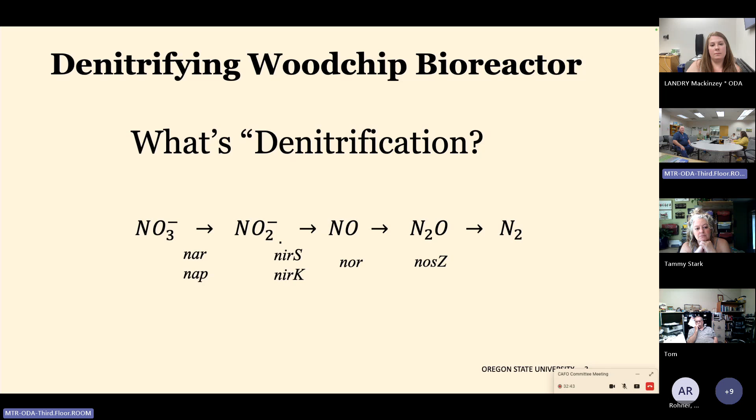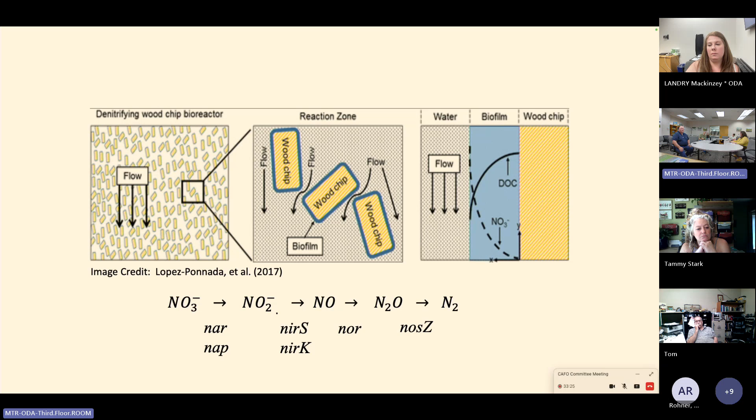Next slide. So this is all mediated through microbes. I won't go into this in too great a depth, but basically the wood chips form a food or substrate for the microbes in the system. When you set the system up, the wood chips are naturally inoculated with denitrifying bacteria that exist in the soil. So as the water flows through the system, you get inoculation. And essentially the microbes use the wood sugars to facilitate the denitrification process. So you do need a carbon source. You do need a source of electrons to convert the nitrate to nitrogen gases. Next slide.

This is a schematic of a wood chip bioreactor, showing basically what we have at the dairy center. We're hooked up to the tile drainage system. We're treating tile drainage output. Basically, it's about a 4-foot depth. The water comes in. There's a 40-acre field upstream at the dairy center, and when there's sufficient rain, it feeds the system.

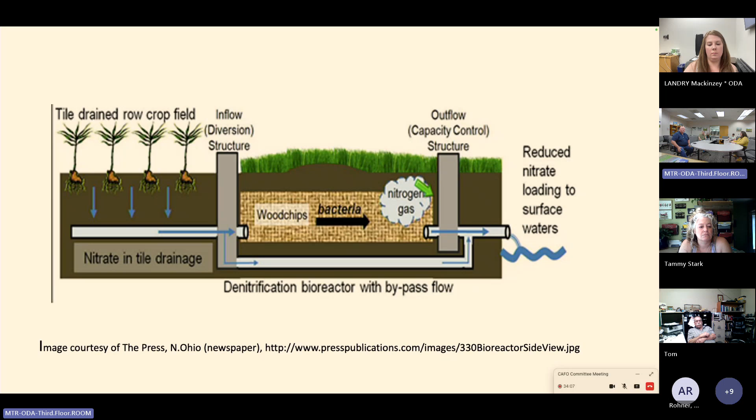And next slide. So this isn't our setup, but there's been a lot of work done in the Midwest, because in Iowa especially, with the cropping systems, a lot of fertilizer ends up in the waterways, and this is a fairly inexpensive way of addressing those issues before they become an area of concern. And so this just gives an idea of the scale of these systems. Sometimes they're up to a third of a mile long. They can be pretty big. It really just depends on the land that's being drained and so on.

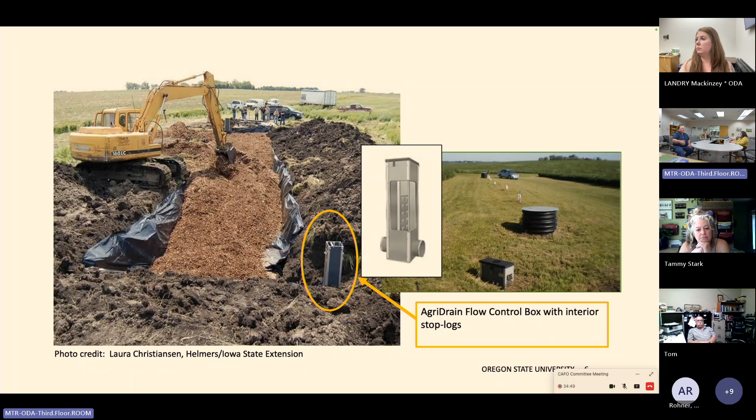Next slide. All right, so a lot of work done in Iowa. In the Northwest, the weather trends are completely different. It's almost the opposite. In Iowa, you have the very cold winters, the very hot summers, and most of the moisture occurring as you move through the summer season. In Oregon, milder winters, the summers tend to be drier, with most of the moisture occurring in the fall, winter, spring. And so one of the key questions that we were trying to address was how applicable these systems were in the Pacific Northwest, and whether there were differences in operational parameters that we needed in order to have the system.

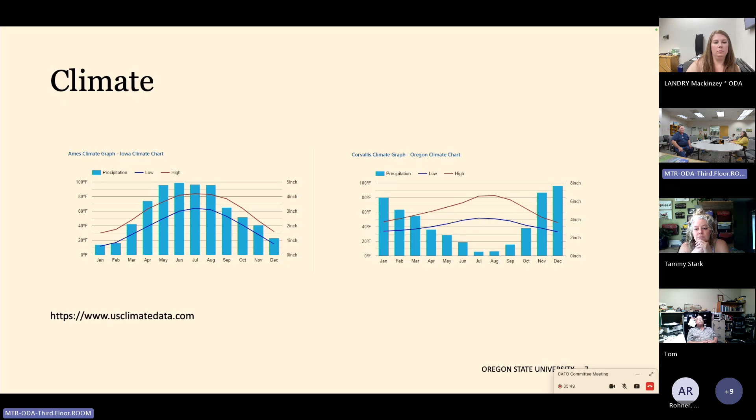Again, 40-acre field, mild slope, fairly typical soils for the area, and per the CAFO plan, liquid manure is spread seasonally as conditions permit. Next slide.

This is our unit. It's a little bit smaller than the unit we showed before, but it's still fairly sizable. This is actually the second bioreactor unit we put in. The ODA funded a pilot unit that was about 20% the size of this. We learned a lot when we installed that. It's a little bit upstream of where this one is, across the road. A great deal of thought went into this in terms of having it as an experimental unit. So this has some additional features that aren't generally present in these systems.

For example, the white ports allow you to sample the liquid at different levels within the bioreactor, understanding that the liquid closer to the surface would actually have higher oxygen. So there's some interesting questions that come into that. USDA does have guidelines for the bioreactor systems that came out of the Iowa work. We pretty much followed those guidelines when we installed the system. 60 feet by 12 feet by about 4 feet deep. I'm in that picture up there on the upper left, so that gives a sense of scale.

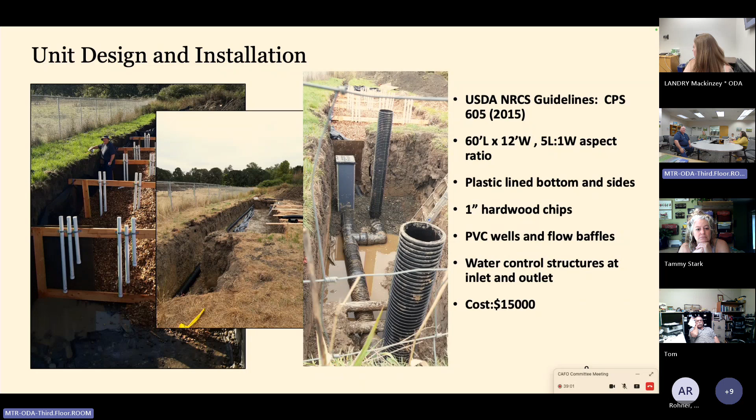A lot of the technology associated with building these units, so the AgriDrain units, you can hook them up to a tile drainage system and control the water table in the field, that kind of thing. So that's what they were originally developed for. Next slide. So this is just a plan view of the bioreactor as it's been installed. Side view. So the control systems and everything else will be on the left of the figure as you look at it. It's just a CAD drawing of the bioreactor unit. Next slide.

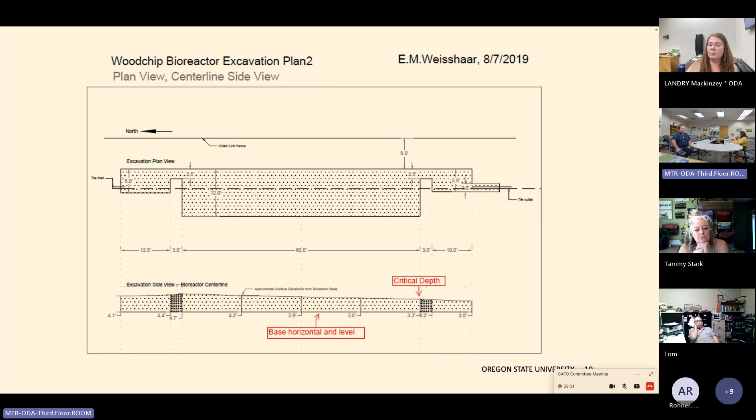A lot of data was collected as part of this study. Obviously, water quality data looking at nitrogen. Also interested in E. coli. Turns out that the wood chip bioreactors in some senses remediate the E. coli. It's a little unclear as to what exactly the mechanism is, and that's actually one of the things that Elsie's been looking at. Is it adsorption to the wood chips, in which case you may be able to saturate the system and it stops treating the E. coli, or does it actually have some sort of bactericidal effect? These questions are open right now.

In addition to the water chemistry parameters and the E. coli, we did a lot looking at the hydraulic characteristics of the system and how varying those hydraulic characteristics changed the treatment profile of the nitrogen that was going in. Next slide. So basically the flow rate through the system, we didn't actually have a flow meter hooked up, but with the HOBO we could get an idea of the head that was in the system, and from that head, we could get an idea of flow rate.

Hydraulic residence time, so that's basically the time that an element of the fluid remains in the bioreactor. It's a very important parameter affected by a variety of different operational characteristics of the bioreactor. And Elsie did some sodium chloride spike tests, where basically because of the way the system was designed, we could put in a bag of salt, monitor the outlet, and figure out how the internal mechanics of the bioreactor were working. The kinds of things we looked at was

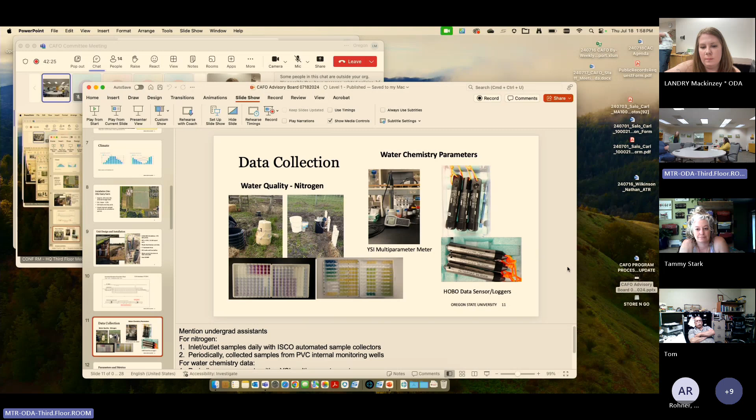Continue watching. See it. You do? Usually it's on our... Yeah, because nothing is on my computer at all. All right. So can everybody online still see the slideshow? Let's see what happens in 7 seconds. Yes. Cut the blue wire. Right, exactly. No. Oh. Almost. Oh. There it is. Okay. All right. Sorry, y'all. Internal room, I think. Gotta go back a little bit. Down the next slide.

Yeah, there we go. And then the other thing that we're looking at is the percent of the inlet that's actually treated. So if you have a very heavy rainfall, the system is actually set up for you to bypass. In the Agri Drain control system, when the water reaches a certain level, it overflows and it goes into a bypass. And the reason to do that is the bioreactor does not work very well if you're oversaturated with water. So a certain percentage is bypassed, and you can select the height at which that occurs. There's a gate and slide system in the Agri Drain unit.

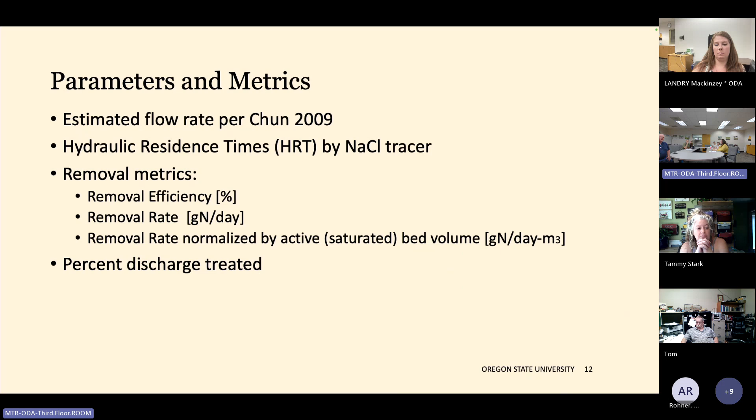Next slide. So this is actually 3 seasons. The first season, we weren't too concerned about hydraulic retention time, which is the orange trace you see on the next 2 slides. It's pretty clear that we're doing something with the bioreactor. The orange trace is actually the head in the bioreactor. So what Elsie did, which I thought was quite clever, is she varied the head throughout the season. Each head height basically affects the velocity of the water through the system, and the contact time with the wood chips. So she did that 2 seasons beyond the first season, where we were just getting an idea of how the bioreactor would work.

The other reason for waiting for the second season is it takes a little while for the bioreactor to break in, because you have to get it inoculated and things have to grow up. And so in a sense, the first year, if you're doing scientific studies, the data is just not usable, because there's so many different things changing in the system. So the startup time for scientific research is really important to get it stable, but in practice, you get treatment in the first year.

In fact, the treatment in the first and second year is probably the best it will ever be. It's still good as things progress, but when the wood chips are fresh and all that sugar's on the surface, microbes are very active. But the lifetime, if you follow the NRCS guidelines, is 10 to 15 years. After 10 to 15 years, the wood chip sugars are consumed, and you'd have to open the system up and replenish the wood chips.

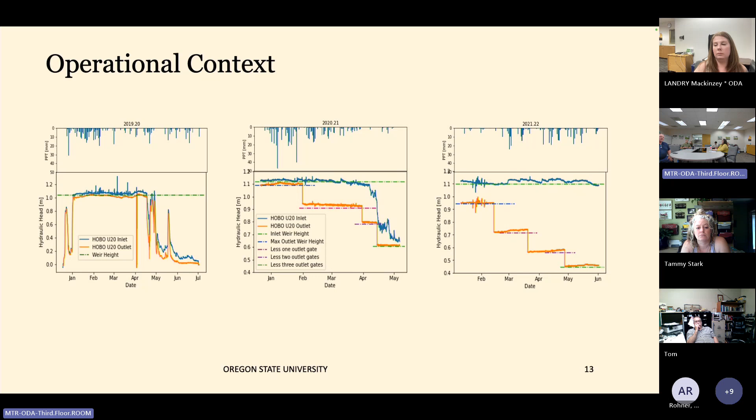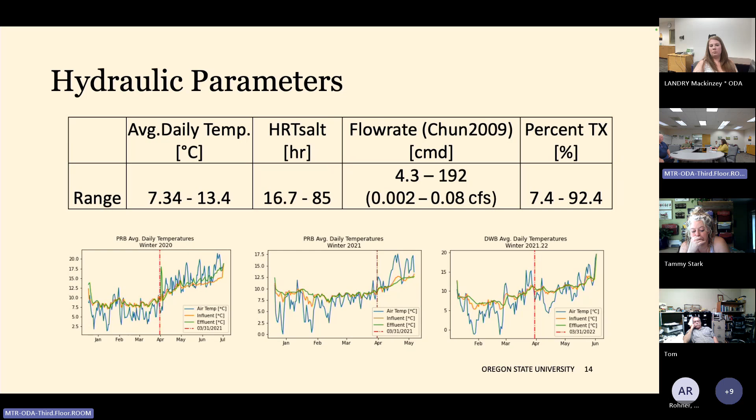Next slide. So some hydraulic parameters. Again, one of the things that we were interested in when we were doing these studies was the effect of a different temperature range from the Midwest. So we have average daily temperature. We have the hydraulic retention time as measured by the salt. Its flow rate in cubic feet per second, and then percent treatment anywhere from 7.4 to 92%, depending on the operational parameters of the bioreactor. Next slide.

All right, results. How am I doing for time, by the way? You're doing good. It's only 2. All right. So you're just now starting your presentation. So you're good. I'm good. All right, results onwards.

So the blue trace on these charts is actually the outlet, and the purple trace is the inlet. And as you can see, on the left-hand diagram, it's really pretty obvious, there's those inlet spikes, and the outlet is basically below the EPA drinking water limit. And again, in the second and the third season, similar treatment. A tremendous reduction in that nitrate. So the system has been operating pretty successfully.

Can I ask a question about the field conditions? So those are the fields that are draining. How did you look at the inputs that were going on the field, and when you would see a spike, how that relationship was? Or were you guys spiking the reactor to see what came out the other side? No, this is from the field. We have not correlated inputs. The input measurement is what's coming in the pipe into the bioreactor from the field. Okay. We haven't actually looked at the records and said, on day 1, this was applied, and then we see an increase in day 3. Okay. That would be a very interesting study to do.

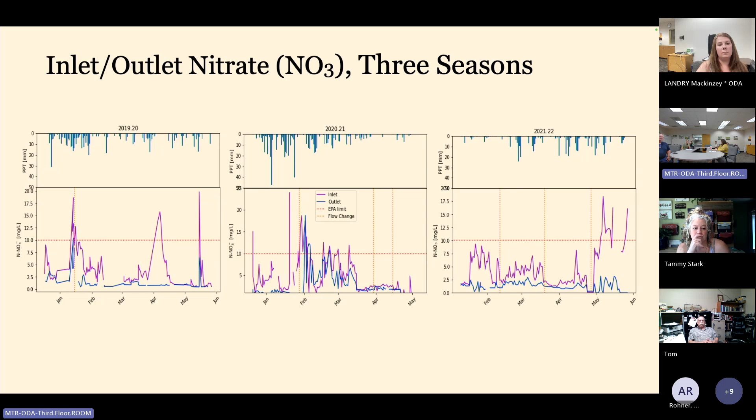But we haven't gotten that sophisticated yet. But anyway, 3 seasons and 3 years of good treatment. And the important thing is this is in the Cascadia climate regime. So obviously the technology, and you know, when you think about it, during the summer, the system sits there dry, but it still functions. I bet if you were to open it up, and we haven't done that, it would still be damp. So the bacteria are in suspended animation. And in the winter when the first rains hit, it just fires right up. All right, next slide.

Looking at nitrite. So Elsie made all the liquid measurements for the denitrification train. Not very high levels of nitrite, as one would expect, since that's the intermediate and would be consumed almost immediately. So it just again shows that the bioreactor is functioning well within the Cascadia regime. Next slide.

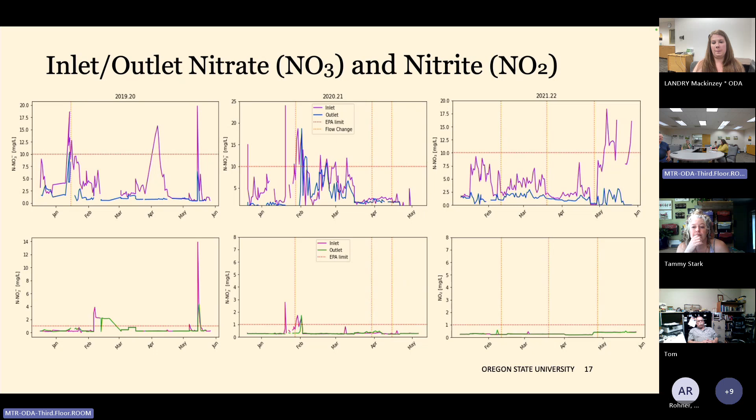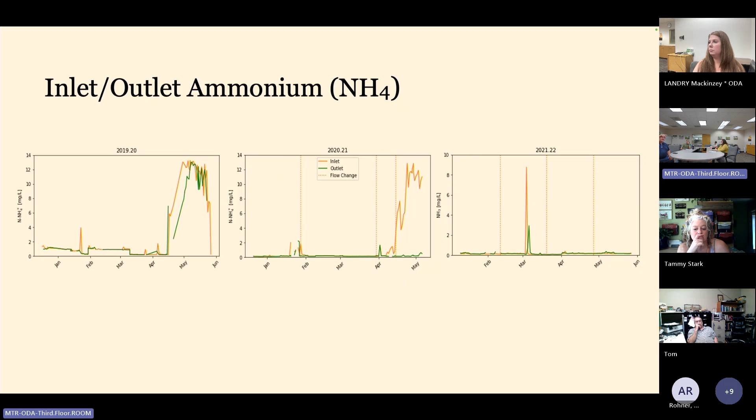Also looked at ammonium, which is kind of interesting because obviously it's not very mobile in the soil, but we're seeing some at a much lower level, on the order of 2 to 4 milligrams versus the nitrate, which was higher. So the scale is much smaller with this one. Next slide.

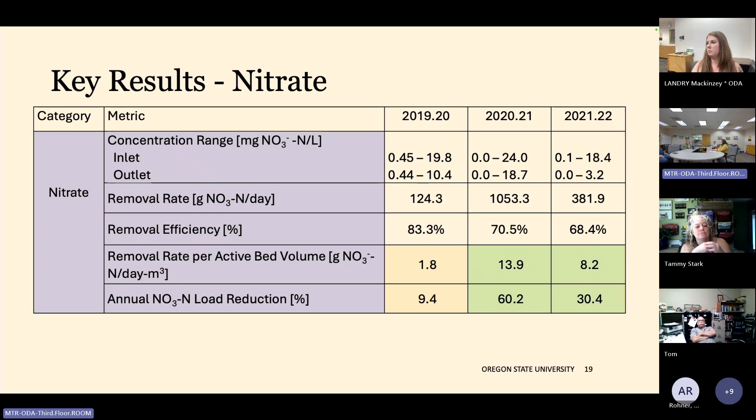Yeah. So I was just wondering, on that previous slide, the removal efficiency in the first year is 80, and it was slowly going down. What's that trend over time, because you said the first 2 years are the best? Yeah, the first 2 years are the best. You do see it goes up, and then you do see, it's not exponential decay, but you do see a decay with respect to time. And the unit's still functional. We could wait until you do your year 5 and year 10 data gathering regime and take a look at that. Oh, do you want me to go back?

No, that's fine. So one of the things is, this is a very long time constant system. I've been lucky. Elsie has been part-time. She's been here for 8 years, working on various things. She worked on it as an undergraduate, and she's worked on it for a master's. She's working on related things for her PhD. So there's been this institutional memory at the graduate student level that has been very helpful. That is not normally the case. All right.

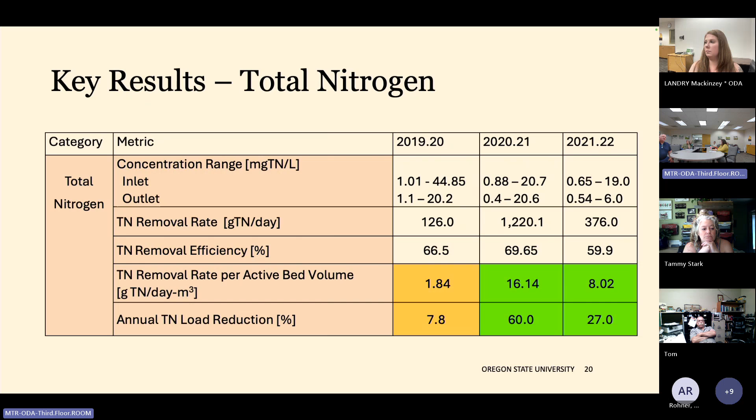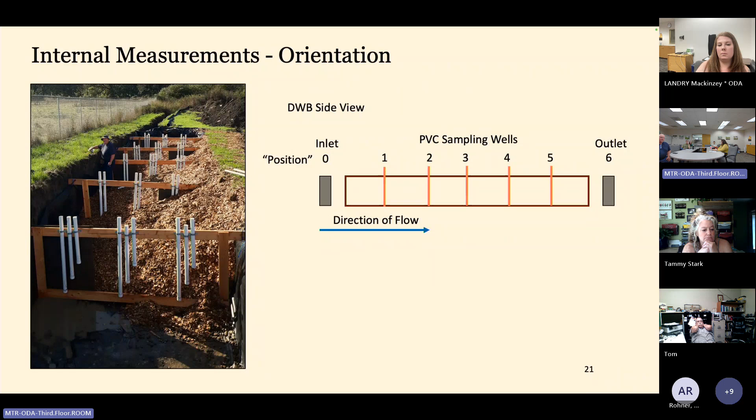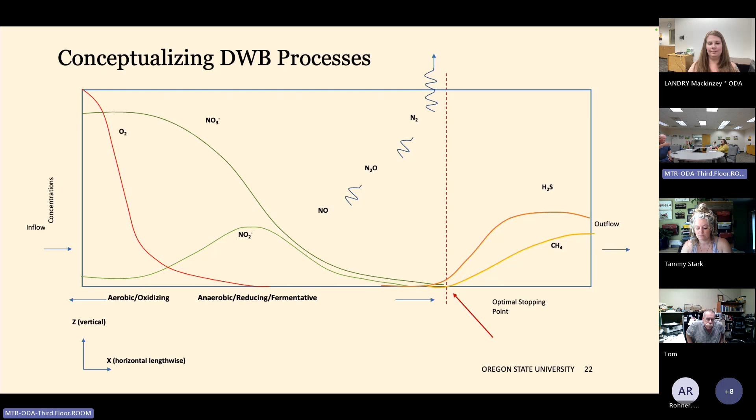Next slide. And so to manage that, are you just increasing the head for increased flow? Yeah. You want to flush the system through so that you get sufficient oxygen at the end of the bioreactor that you avoid the truly anaerobic functionality.

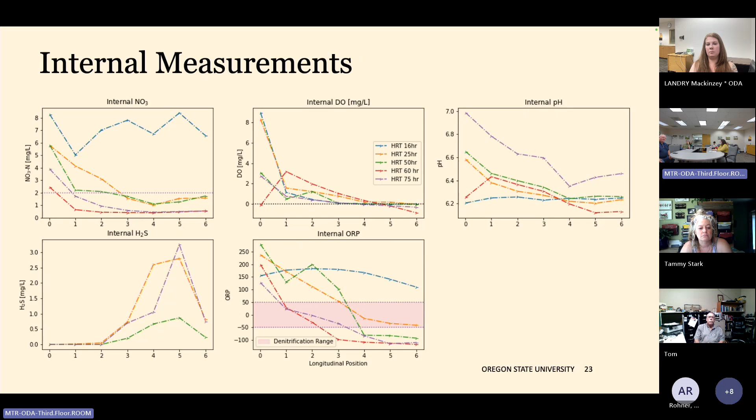And then this is actually the actual internal measurements. And let's see, pH, DO, nitrate. You can see the H2S under the conditions that she was running it. So this is again longitudinal down the bioreactor. So the interesting thing about this is we have sort of this conceptual understanding, and then the experimental results pretty much were in alignment with the conceptual understanding, which was nice. All right, next slide.

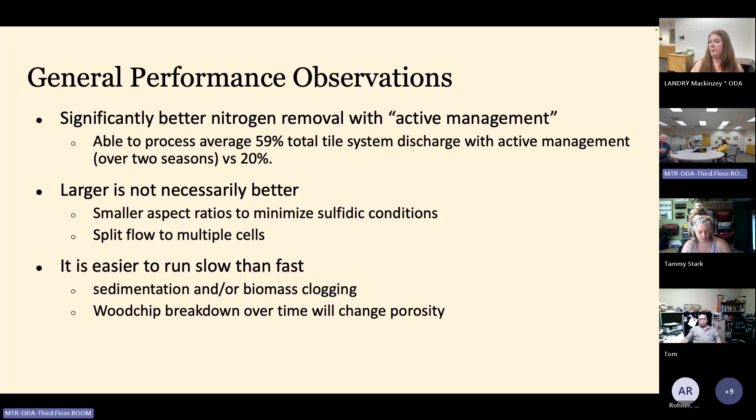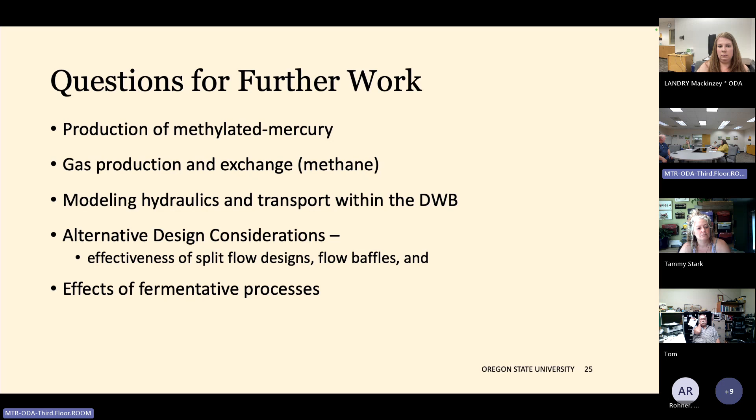The main issue with that is, at the end of the 10-year period, it makes it a little bit difficult to pull wood chips out and then replenish it. And so something to think about: if there are concrete structures on the farm, either to have a concrete bay, or sometimes there are concrete structures on the farm they might be able to use in the wood chip bioreactor for that. Next slide.

So it works in Oregon. I also did a lot of work looking at with baffles, without baffles, the length to width ratio, 3:1 with baffles, 4:1 without. Split flow designs are basically mini bioreactors that you run different. And then further studies needed on potential byproducts.

We're also interested in the E. coli remediation. And it would be great to be able to run another season or two of just sample gathering and seeing how that functionality is changing.